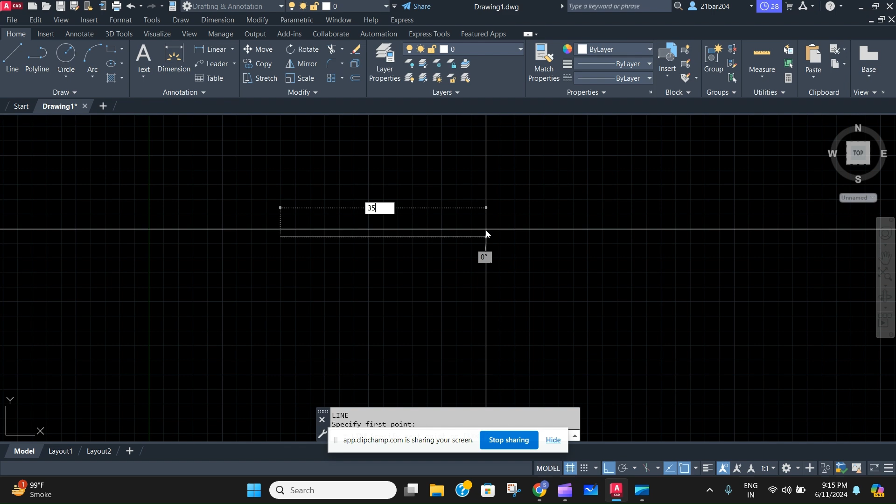For that, the first bigger size of the solar panel is going to be 35 inches. Then the smaller size would be 18 inches. Then again the same 35 inches, then again 18 inches, and that's how the outer rig of the panel is now ready.

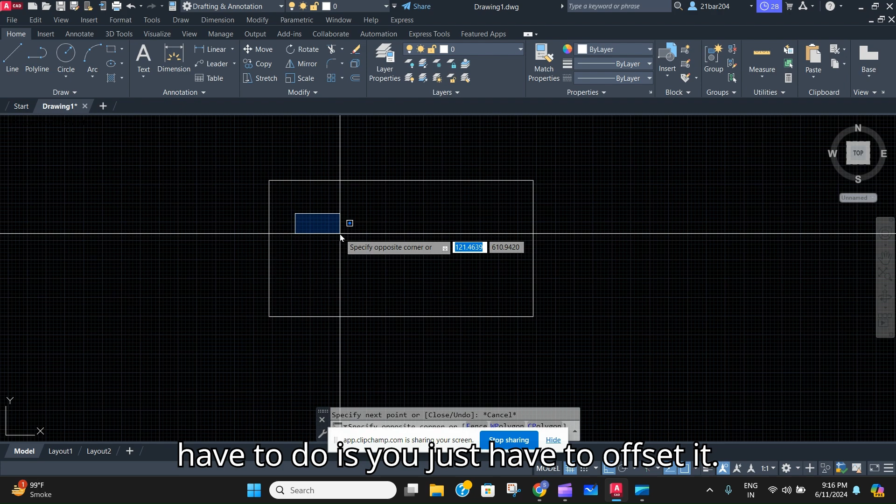After this, what you have to do is just offset it. A simple way is to join all of it, then offset it. Press offset, offset 1 inch. Perfect. Now the inner rig of the stainless steel panel is ready.

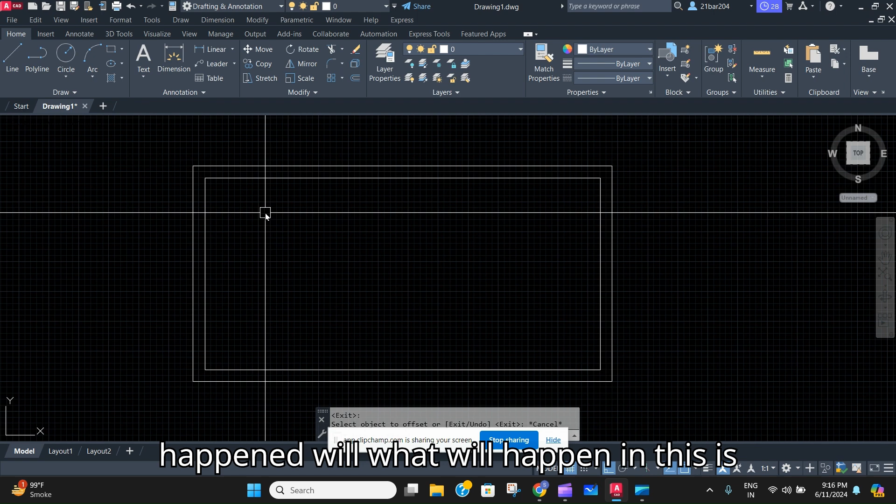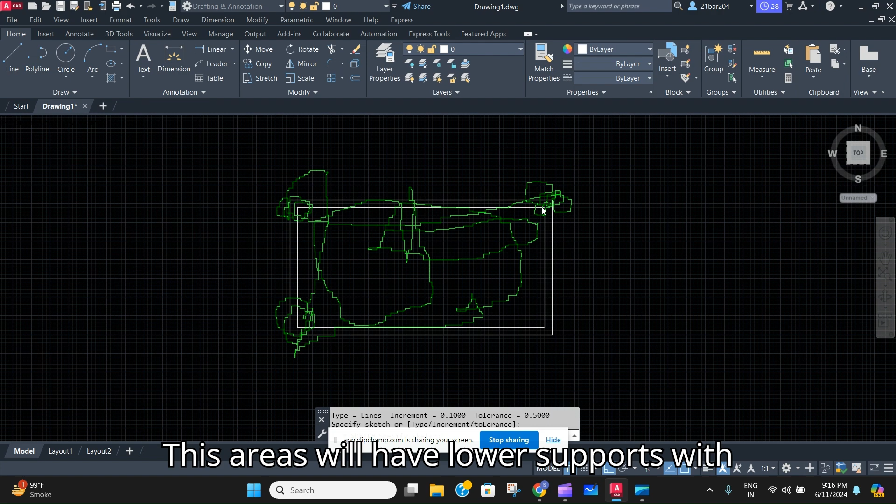I'll show you an overview first, just a sketch, that this area will have cells in it, and these areas will have lower supports with it. This is how the whole panel will look when we finally complete it. So that's all the overview.

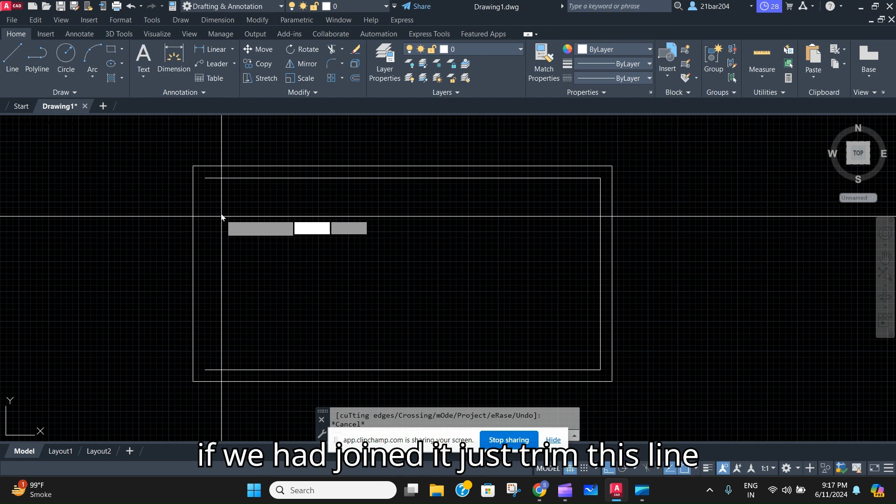What you have to do after this is select this line. We had joined it, so just trim this line and make another line, and divide the smaller line after the line you offsetted, which comes down to 16 inches. Now the overall dimension is 18 inches, but this line dimension is now 16 inches.

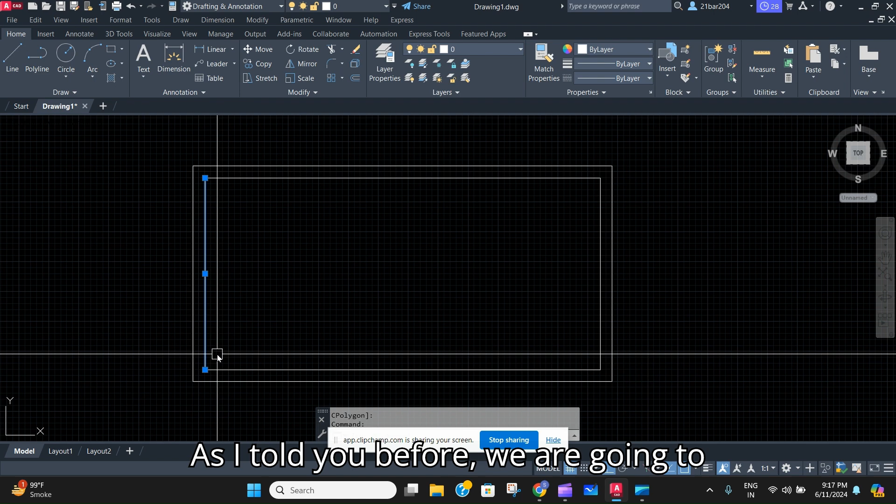As I told you before, we are making a 60 cell solar panel, whose size differs from country to country, state to state, manufacturer to manufacturer. So this is the standard followed in India.

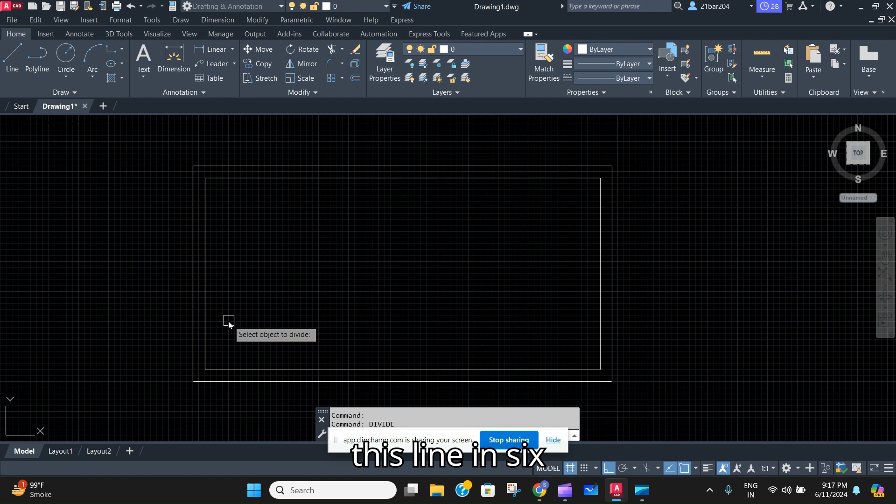Now you have to divide this line into 6 parts. So now just select the first, make a line.

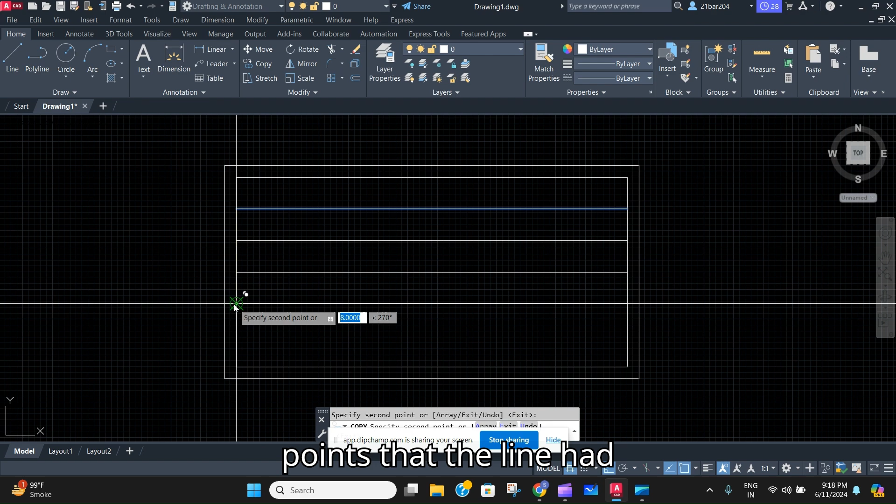Then select the line, copy multiple, CO is the shortcut, and just place it on all the 6 points that the line had divided.

After this, we have to make the vertical lines, which will now complete the cells. Just trim this line off and make another line.

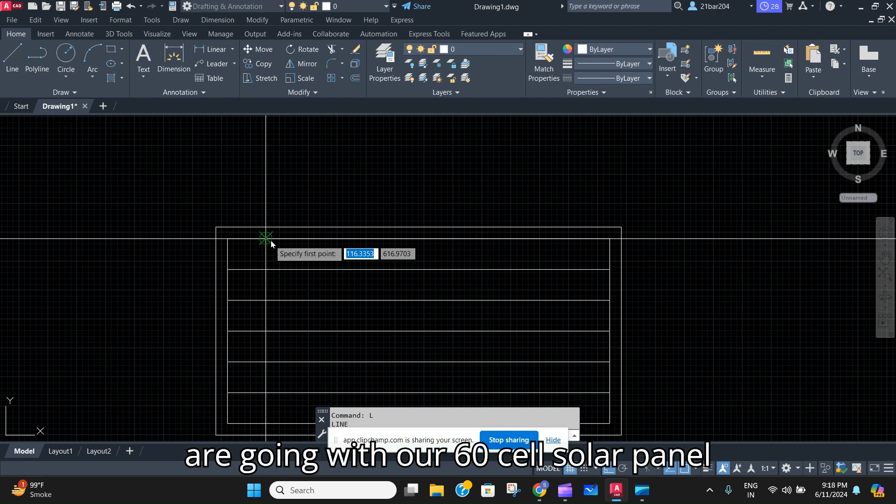Then again write the command divide, select the line you want to divide, and write 10, because as I told you before, we are going with a 60 cell solar panel. So this side 6 into 10 becomes 60 cells.

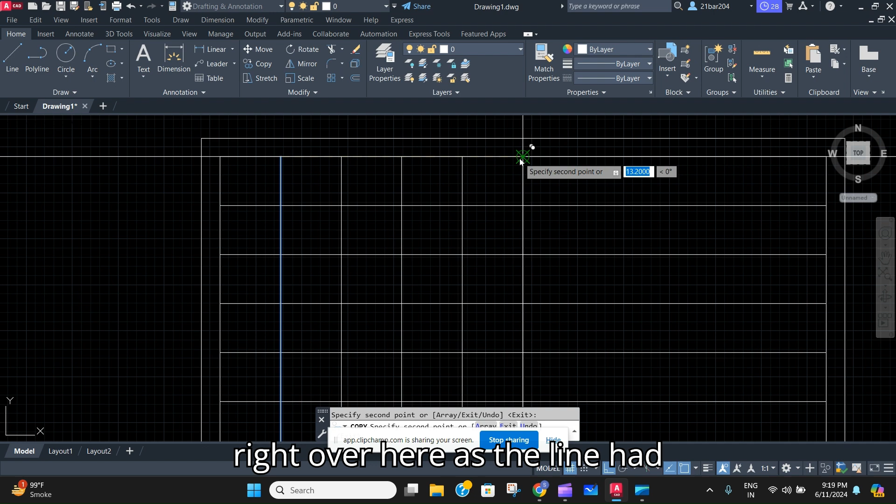So using the same method, select this line, copy it multiple times, and place it on all the 10 points as the line had divided. So here we easily made a solar panel of 60 cells, which is right over here.

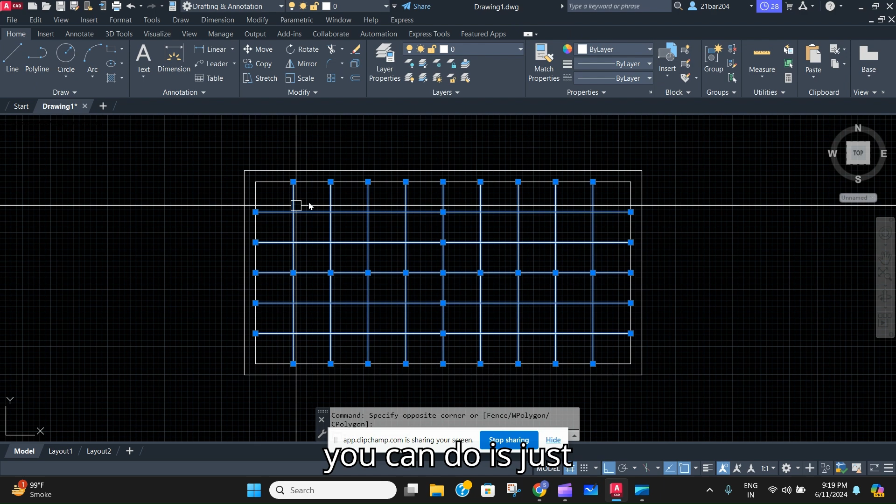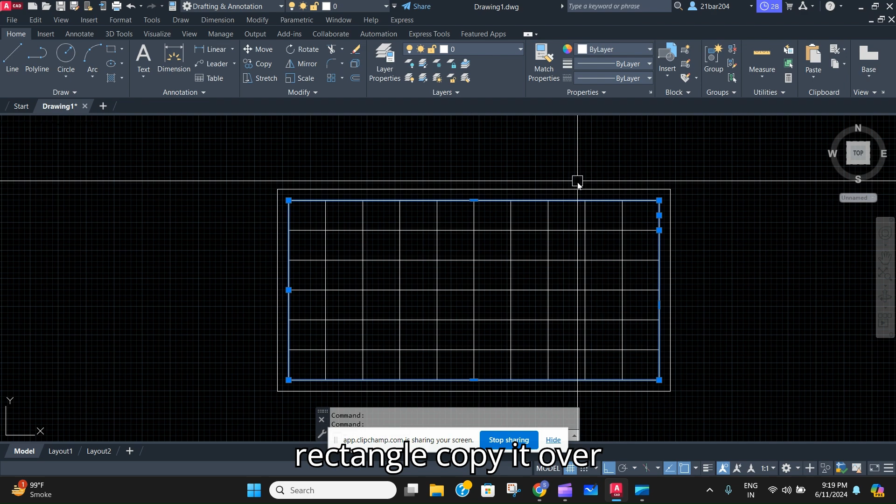What you have to do after this is select the hatch. What you can do is select this inner rectangle, copy it over here.

Here you have to hatch it, firstly with a solid blue color, a light blue color like this. Close. Then you have to do another hatch of dots, which is going to be white.

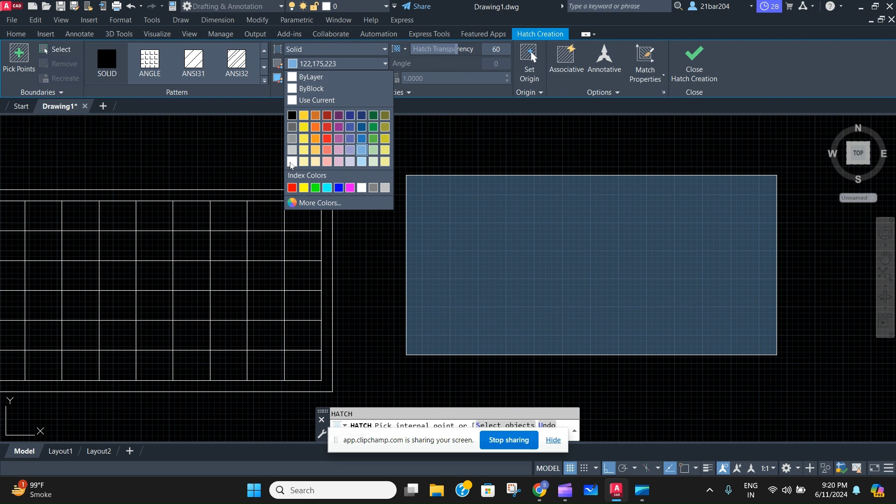You have to select dots from this one. As you know, the cells have dots in them, so you just select the simple dot hatch that is available in the AutoCAD default hatches.

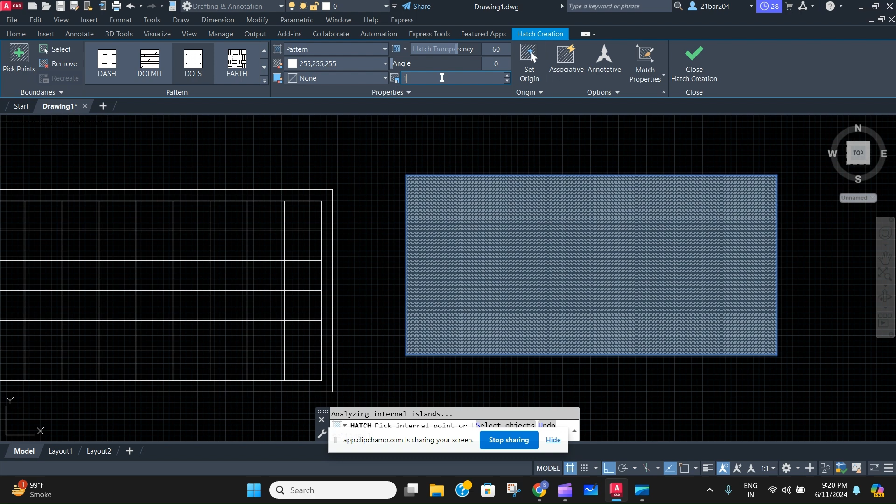And what you have to do is increase this. This is too much. If this is visible, we'll go for 30. This becomes more, so I think 5 will be perfect. As you can see, the dots are clearly visible.

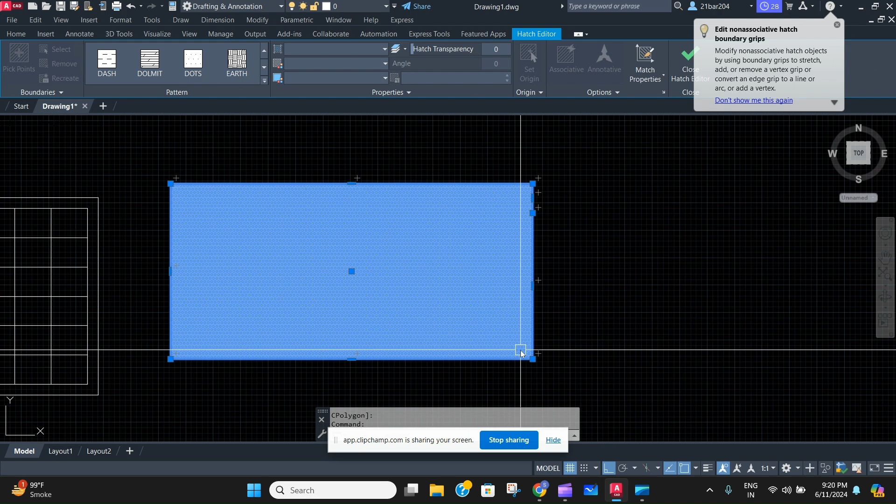Now you just have to select both the hatches and place it over the solar panel. Then again select the hatch and right click on your mouse, draw order, send to back.

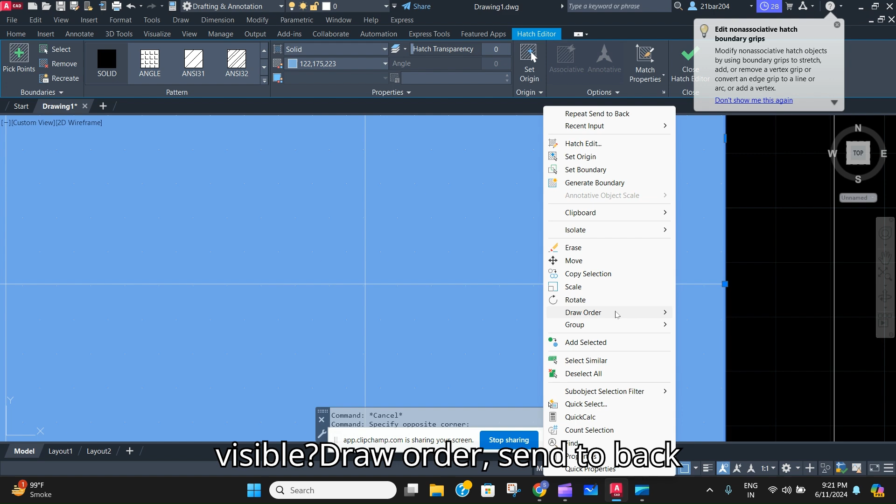And there we go. Why is this line not visible? Draw order, send to back, and just regenerate your model, and you will see all this comes out just perfect. We'll increase this transparency to 60, which will look more realistic.

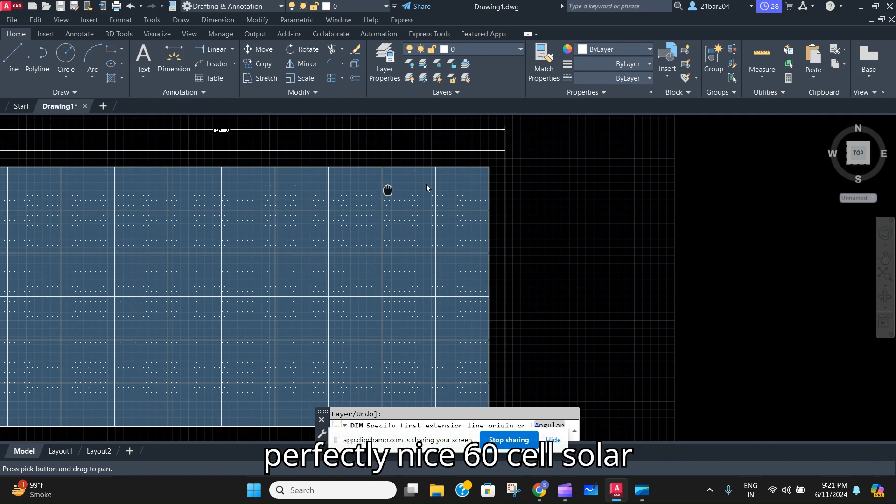As you can see over here, we have made a complete, perfectly nice 60 cell solar panel right here, which is a 35 by 18 inch panel, available around the globe, and you can use it.

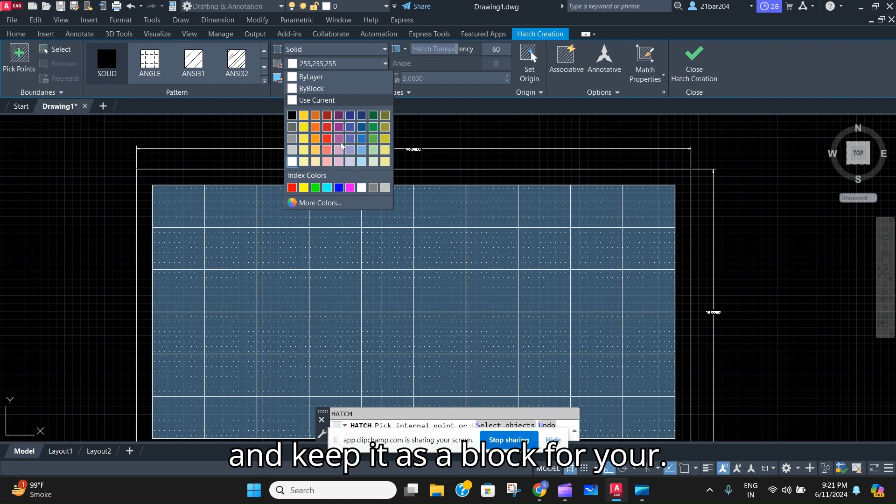You can just make it in how many minutes, like 5 minutes or so, and keep it as a block for your firm, for your personal use or your firm to use just as a block. You can also hatch the outer stainless steel as I told you, which will also look good.

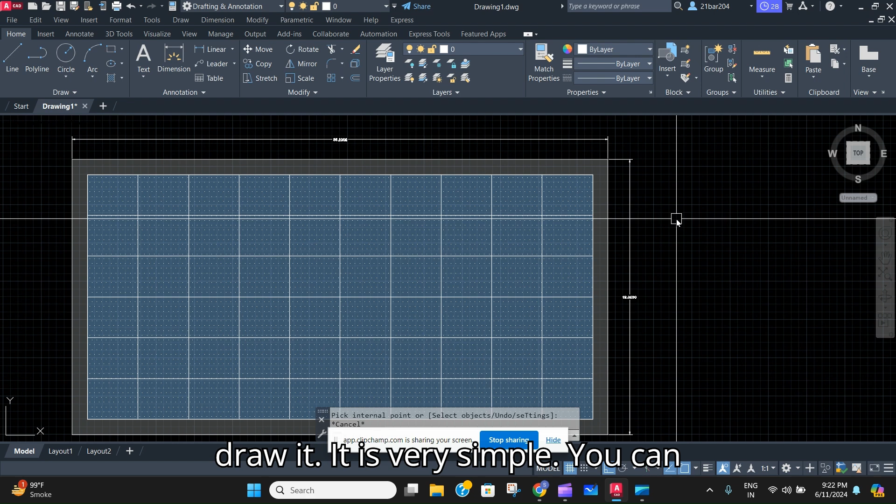So this is what the video was all about, just making one solar panel, and this is how you have to draw it. It is very simple. You can also follow the steps I told you, and make whatever size you want for the solar panel, just following the same steps which I followed.